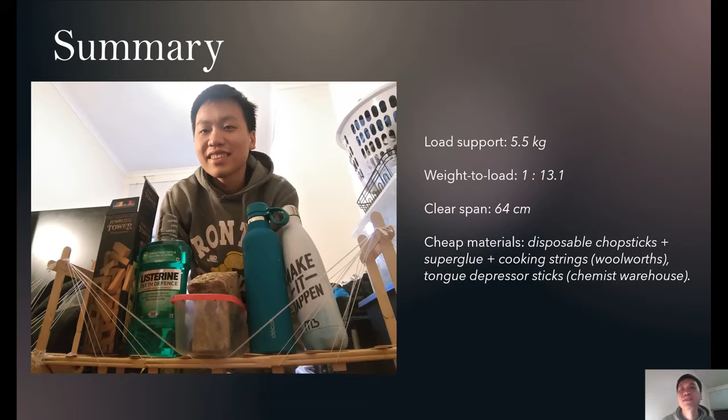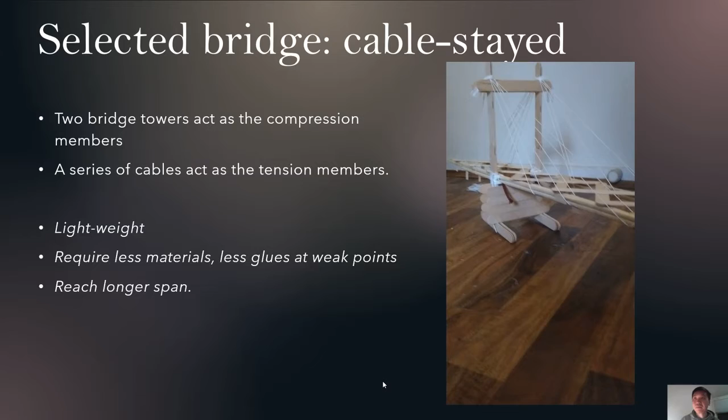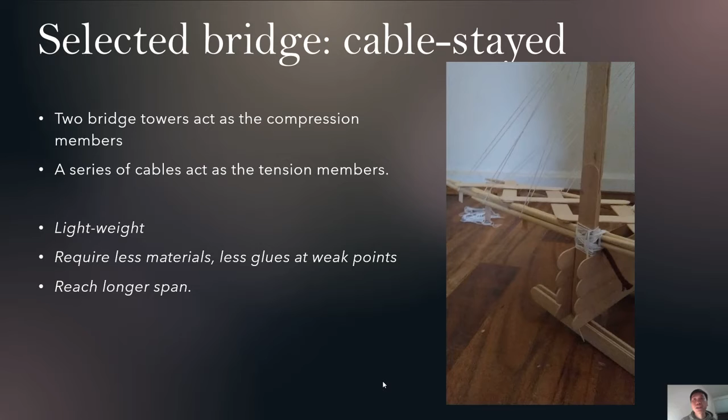In this project, the design I chose is the cable stay bridge. There are two bridge towers acting as the compression members and a series of cables acting as the tension members. The cable stay design has a number of advantages over other designs. First, it is lightweight, requiring less materials and less glue at the weak points. Also, the cable stay design is able to easily reach a longer span compared to other designs.

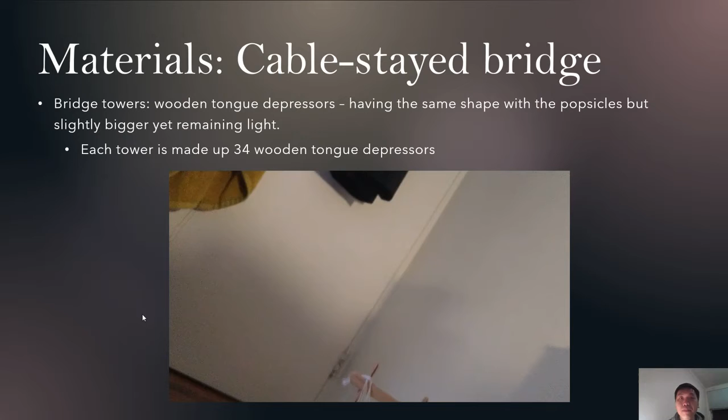In terms of materials, the bridge towers were made of 34 wooden tongue depressors each. Tongue depressors have the same shape as popsicle sticks, but are slightly bigger, yet remain light.

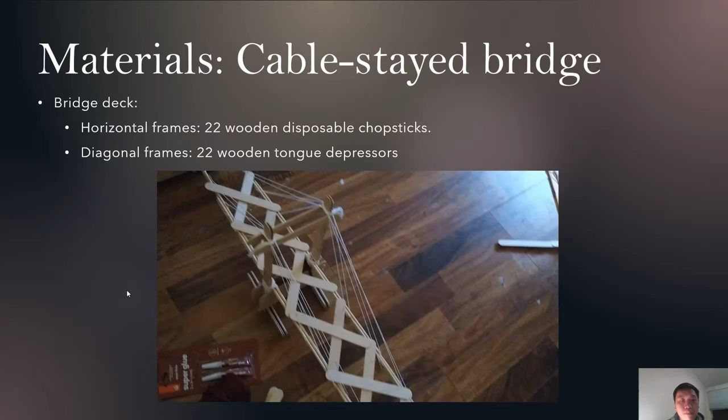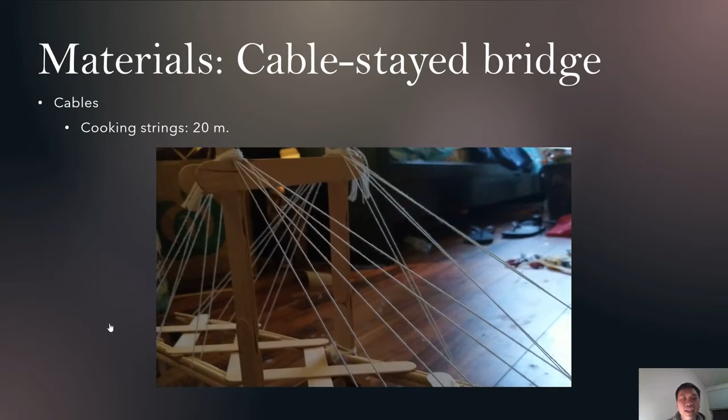For the bridge deck, the horizontal frames were made out of 22 wooden disposable chopsticks, while the diagonal frames were made out of another 22 wooden tongue depressors. Cables are the indispensable part of the cable stay bridge. In this project, they are made out of 20-meter cooking strings.

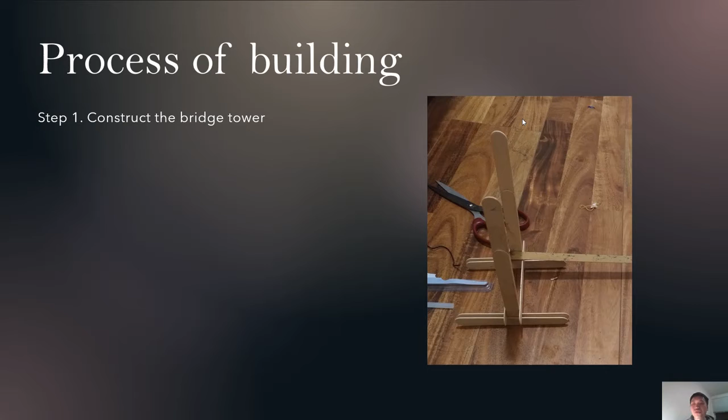Once I had all the materials necessary, I was ready to start building my cable stay bridge. The first step required gluing all the tongue depressors together to construct two bridge towers. After the bridge towers, I glued the chopsticks together to make up the horizontal bridge deck and spanned the horizontal components over the tower support.

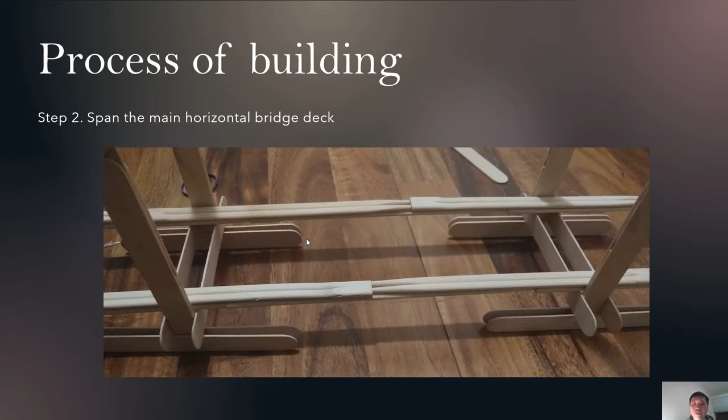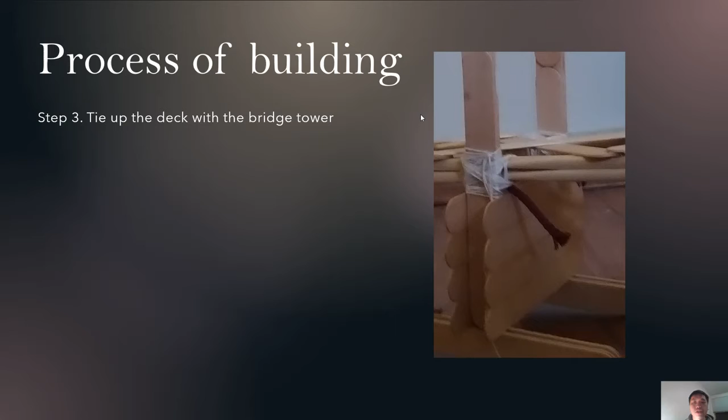The third step required tying up the horizontal components with the bridge tower to make sure the deck was stabilized on top of the bridge support. Once the deck was stabilized, I hung up the bridge deck using cables.

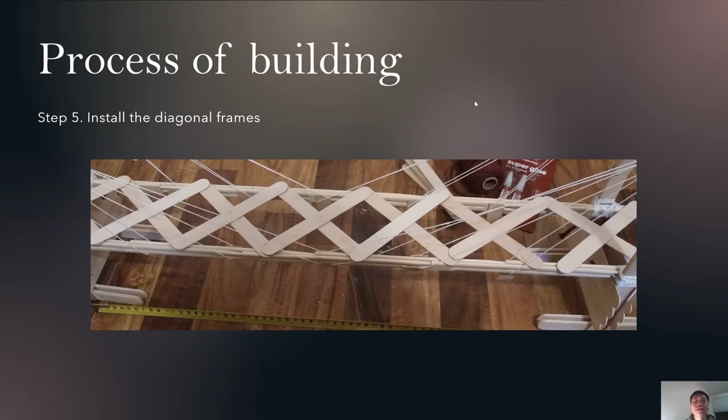The final step of building required the installation of diagonal frames. I put the diagonal frames on top of the horizontal components and glued them using super glue. After this step, my bridge design was complete.

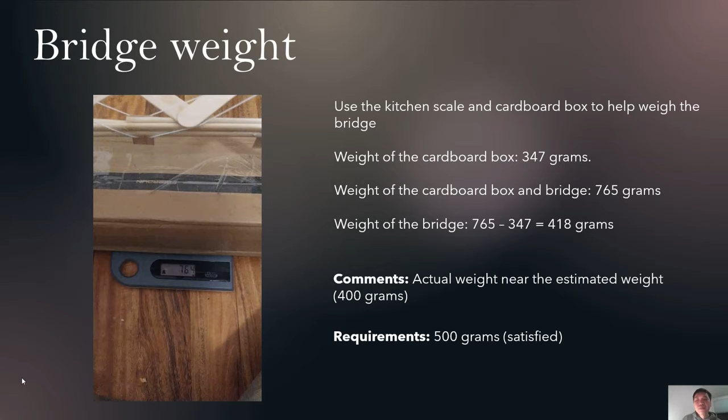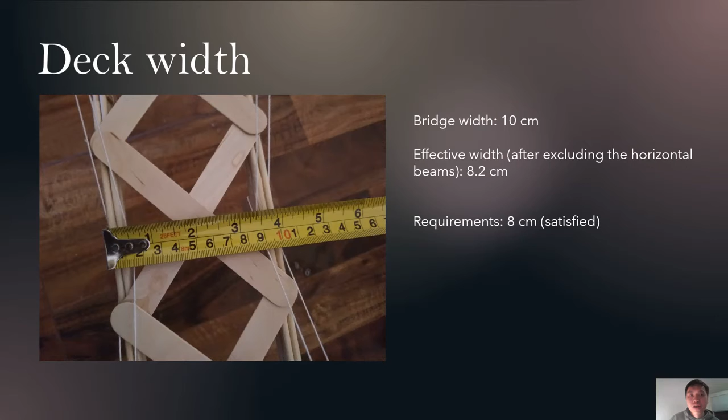When it comes to weighing the bridge, I used a kitchen scale and a cardboard box. The actual weight of the bridge was 418 grams, which is quite near the estimated weight of 400 grams. The bridge has an effective span of 64 centimeters and an effective width of 8.2 centimeters. All of those numbers satisfy the requirements of the project.

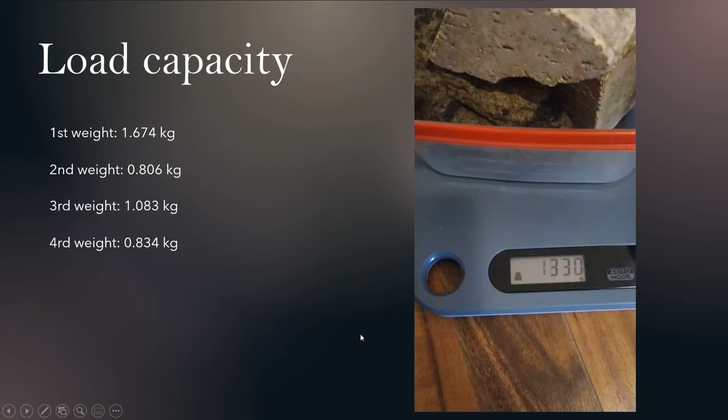Now we come to the most exciting part of this project, measuring the load capacity. The initial load was about 1.6 kilograms, put on top at the mid-span, and we wait for about 10 seconds.

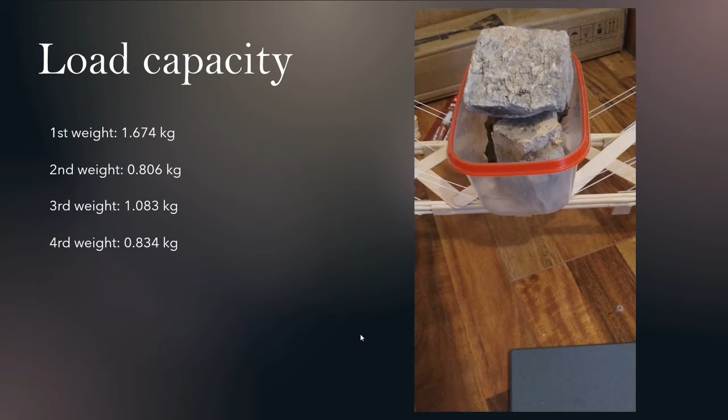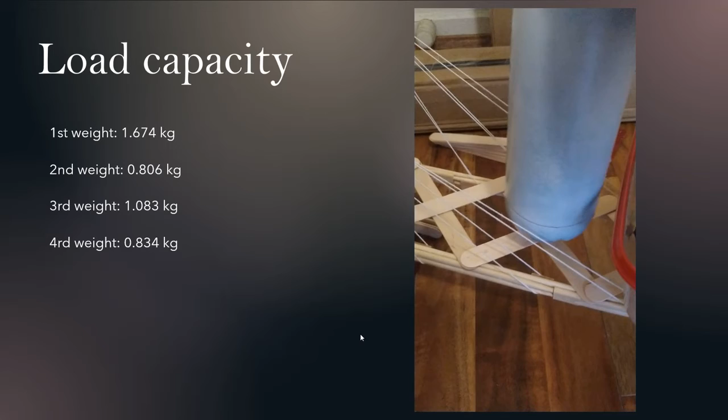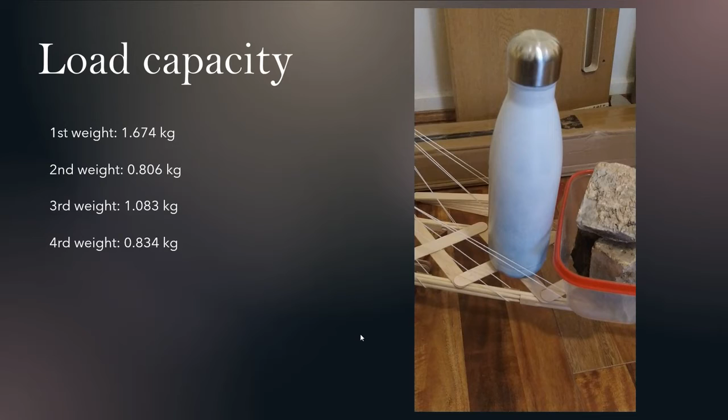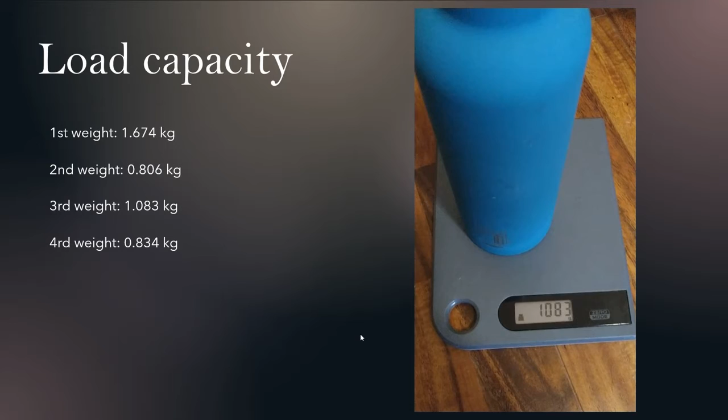The second load was about 0.8 kilograms and was put next to the mid-span. After 10 seconds, we apply the third load, which weighed about 1 kilogram. I put it next to the mid-span and wait another 10 seconds.

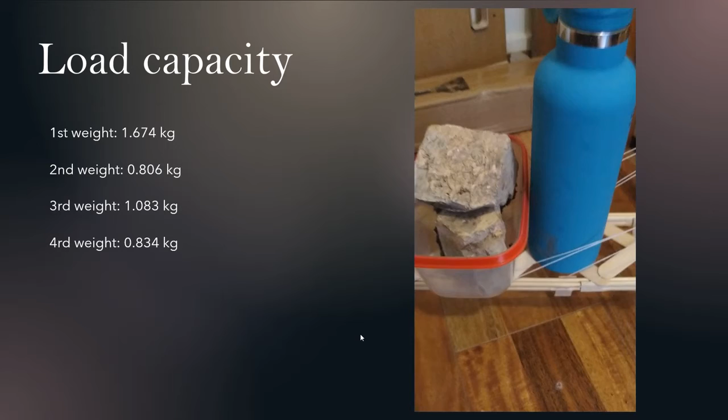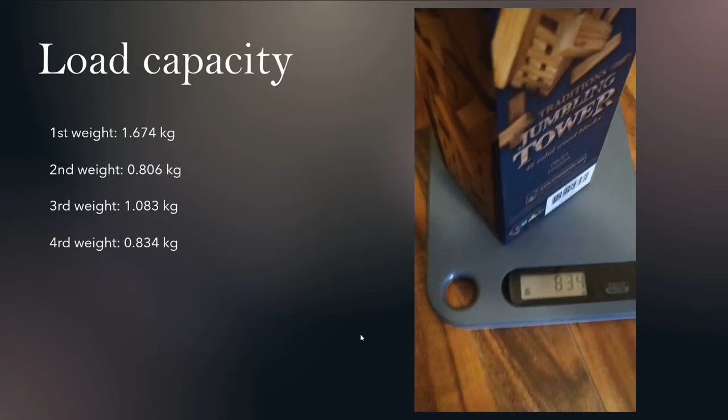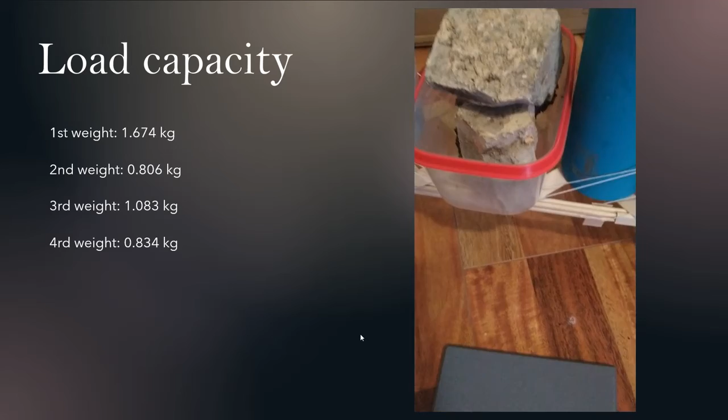Now I came up with the fourth load. It weighed about 0.83 kilograms. I put it on top of the deck and waited another 10 seconds. By now, the bridge was still stable.

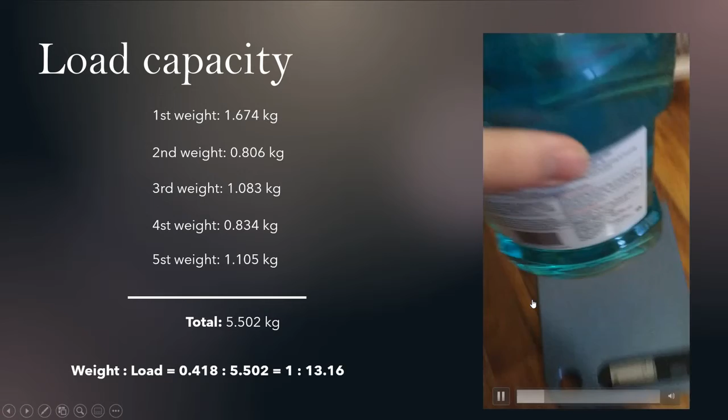I come to the last load, the fifth load. It weighed about 1.1 kilograms. Up to now, the bridge was handling 5.5 kilograms, and this is the maximum capacity that my bridge can handle. We wait for another 10 seconds.

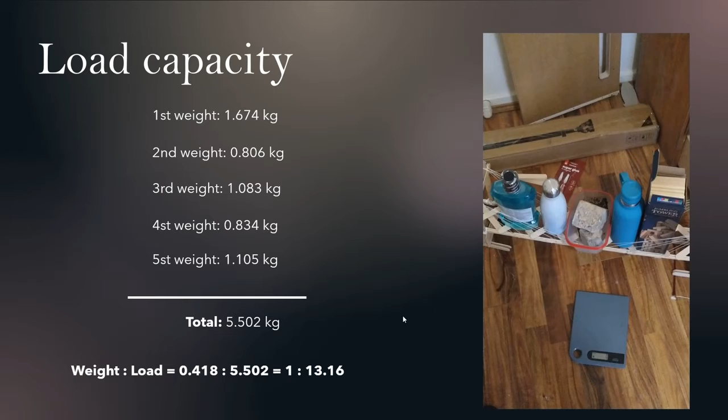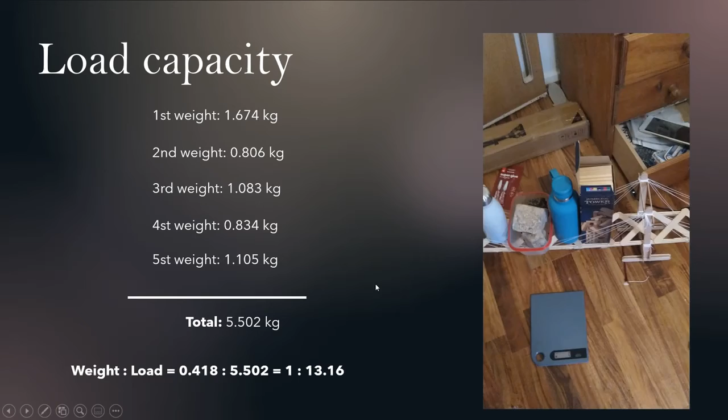Although I believe my bridge can support more than 5.5 kilograms of load, I stopped at this moment because I observed that the bridge towers started to show signs of deflecting towards the midspan. Currently, my bridge achieved a weight to load ratio of 1 to 13.1, which is quite a good number.

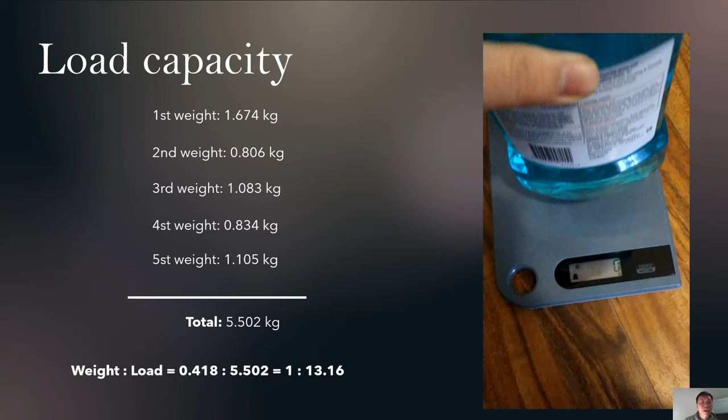I believe I learned a lot from this bridge design project, and I really found it interesting and enjoyable building the bridge myself.

In terms of reflection, I believe what I did well is to meet all the requirements of the project, including the span length, the bridge weight, and the width. I also achieved a very good weight to load ratio, about 1 to 13.16. And all the materials required are very common for everyday use and can be found in every supermarket.

What needs to be improved? I believe the bridge foundations can be redesigned to be shorter, yet firmer. And what would I do differently next time? Maybe I would apply an inclined design for the bridge tower to improve the span length and also make my bridge look more aesthetic. Thank you for watching, and good luck with the entire semester.